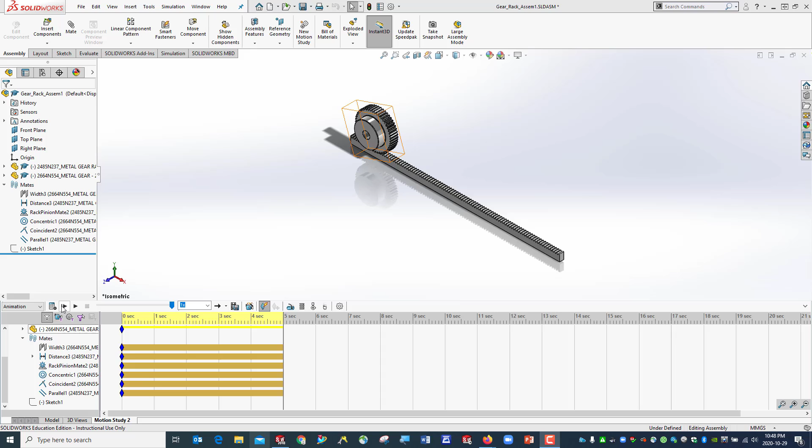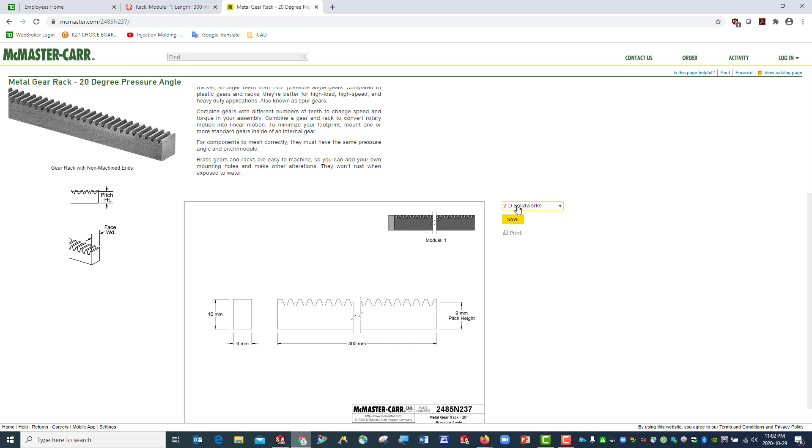First, we're going to make the assembly using a rack and a pinion. You can find those parts in the Lab 6 folder. There's a rack. You can download from here. And here's another one, it's a pinion. You can download from here using 3D solid model.

And you can also get detailed information about pitch diameter, shaft diameter, outer diameter, the width of the teeth, and so on. And also there are some specifications provided here. You can also check the specification here. Once you download those parts, then you will be able to create your assembly.

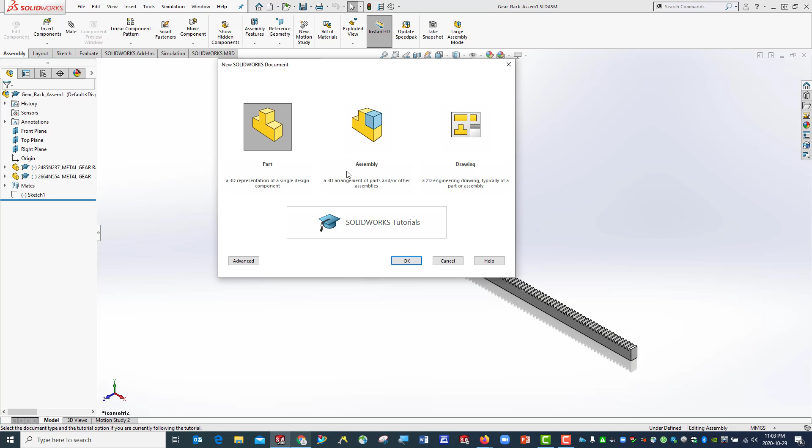Let's get started with a new assembly. Because my parts are all in millimeters, I'm going to use millimeter as our default unit system. Let's save this file as lab 06 rack pinion assembly with an initial.

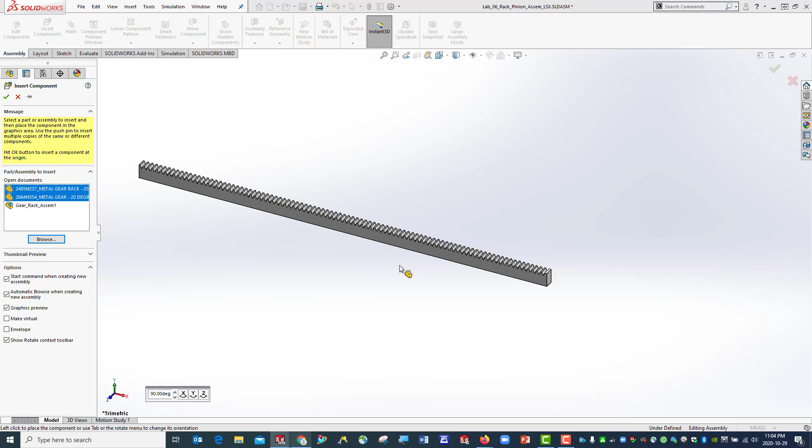Okay, now you can add components. Find those components in your download folders. Browse it. I know it's in my downloaded folder. Hit OK. So I'm going to put it here. As usual, this one is the first one, so it's fixed, right? You will not be able to move it anymore.

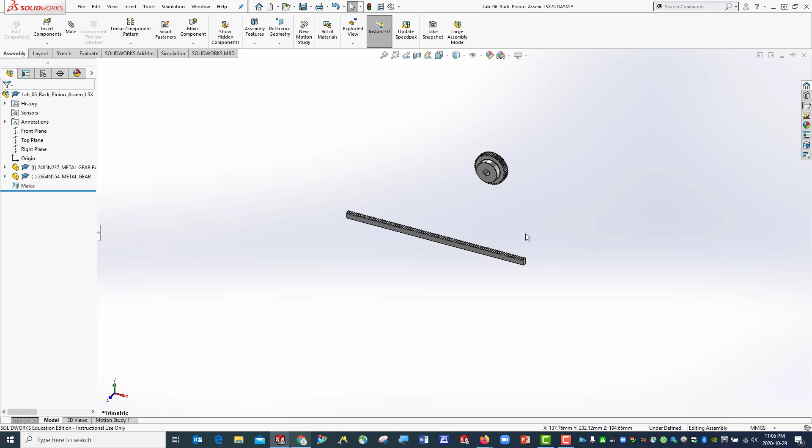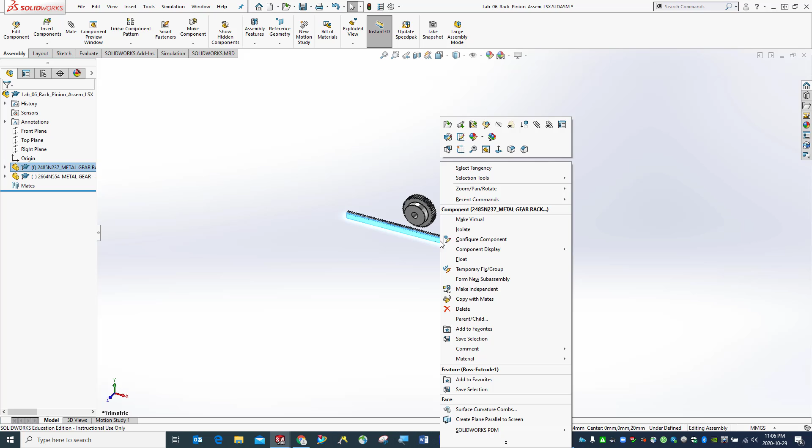And this one is floating. We are going to make the rack stationary, while the pinion rotates on this rack and moves along the rack back and forth. Since the rack is stationary, we simply make it fixed. So the only part we need to put in its correct position is this pinion.

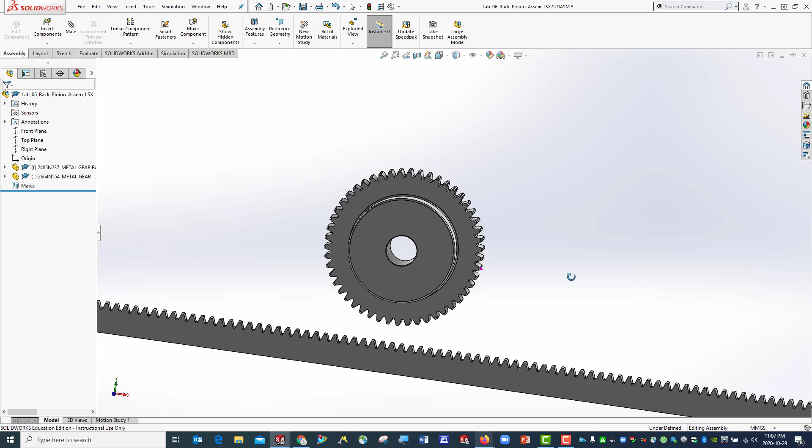So what we can do here, first from this drawing we know the diameter. We know that the pitch diameter is 50, and also the pitch height is 9 millimeters. So that means the pitch diameter should be tangent to this line, the pitch line. So from here to the center of my pinion will be 25 plus 9, which is 34.

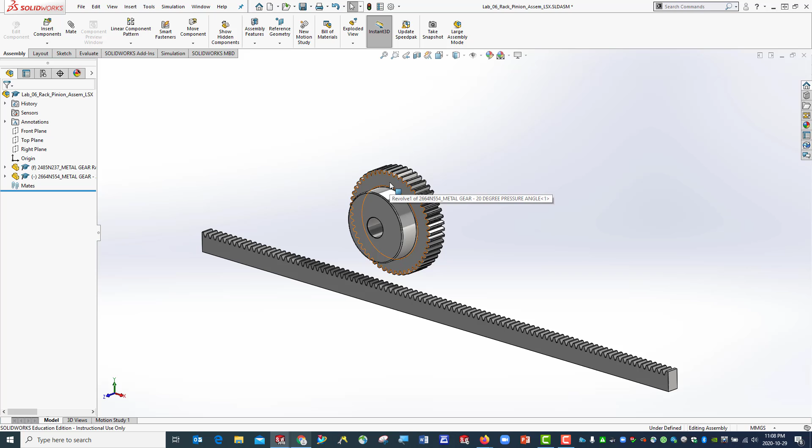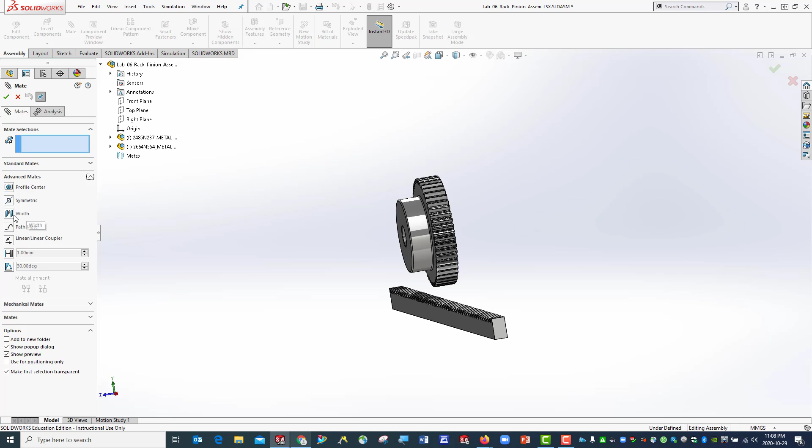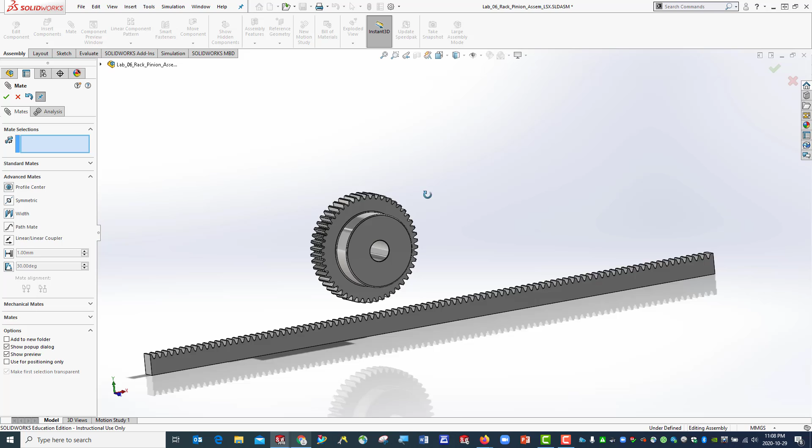So first I'm going to position this. Use the advanced mate method with width. So this width, this face, and also this face and this face to be centered. Hit OK. And now I want to make the pitch diameter tangent to this pitch line.

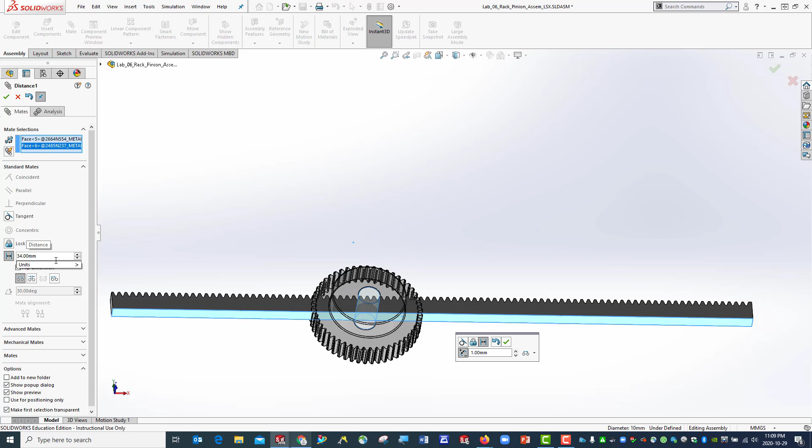So we know the distance of my center line to this bottom is 34 millimeter, right? Let me look at it from the front view. Okay, so it's been positioned. However, this gives center to center, right? So we would like to make something like this, the center.

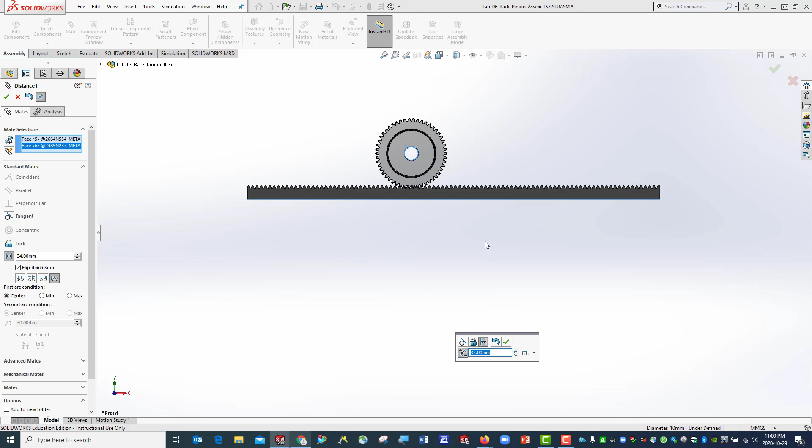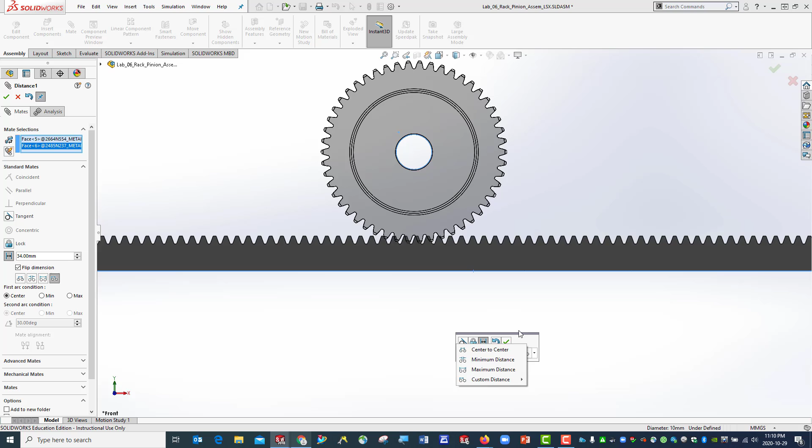Yep, this is correct. So in case you have a different location, then you need to make adjustment using these options. Now accept the mate. Look at it from the isometric view. We can see our part can only be moved along this rack direction, which is good.

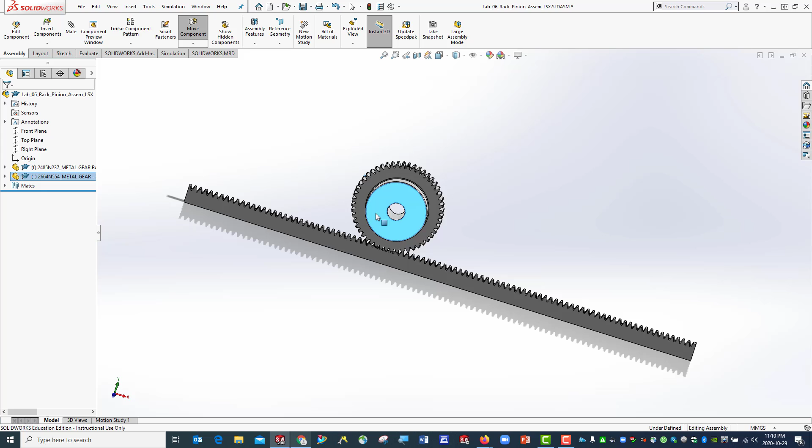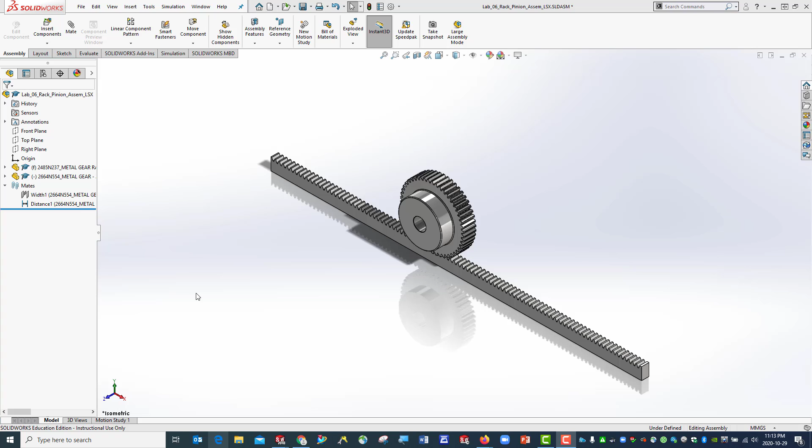And I can also make it rotate. So currently I have 2 degrees of freedom, and I have 0 degrees of freedom for the rack. It's fixed, and I can rotate my pinion, and I can also move my pinion. With my position properly set, then we can start to make our gear mate.

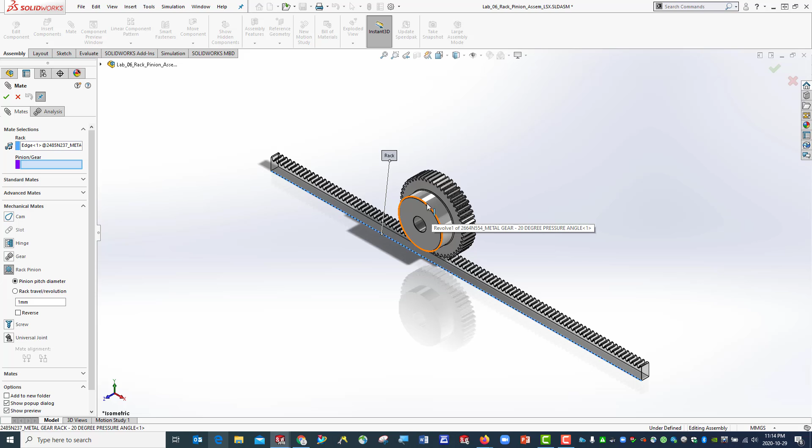This rack pinion mate. So I can choose this bottom edge for my rack, and I can choose my gear. You can choose any of these diameters, right? So it's a rack, and I know my pinion pitch diameter is 50. Hit OK. Hit OK.

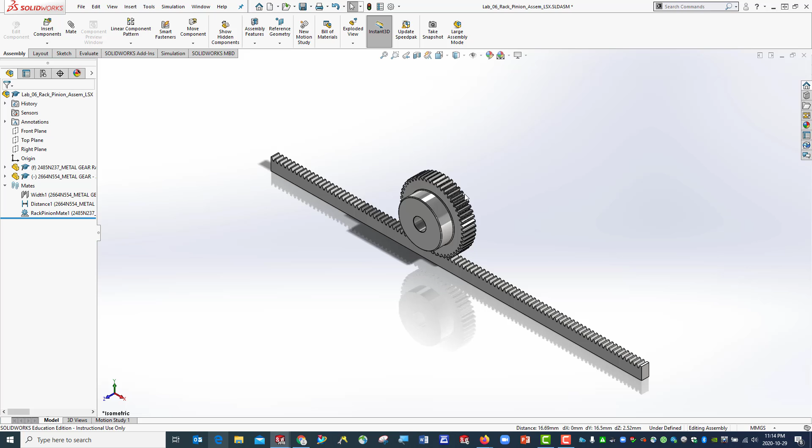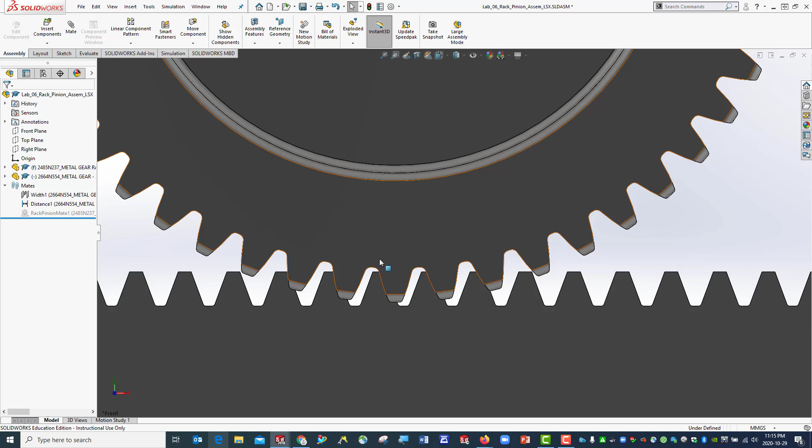Now, if you rotate, it will go along the rack. But there's one thing we would like to do, which is to make the position more precise, right? The teeth are not matched very well. So what we can do here, we can suppress this and then make an adjustment. Okay. All right, looks good to me.

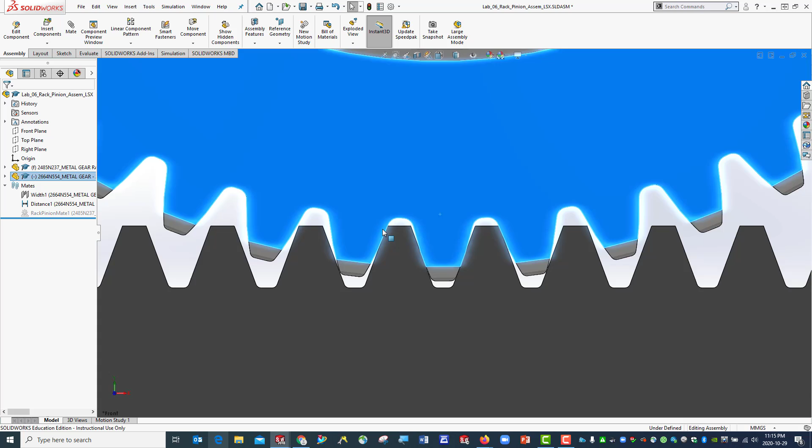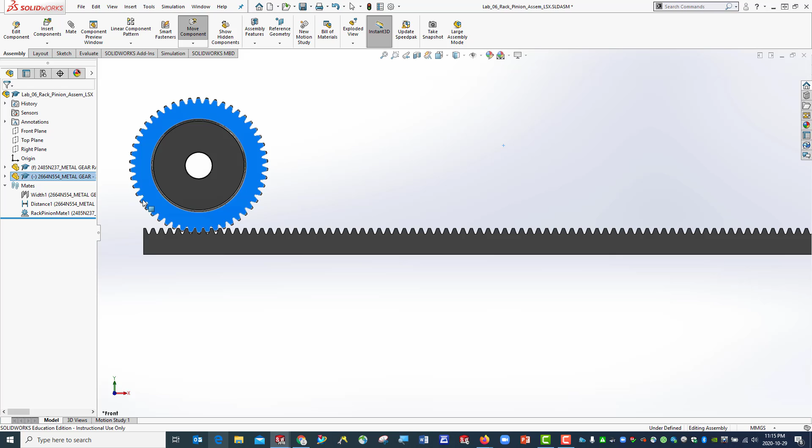Now I can save my file, and then unsuppress my mate. If I rotate again, perfect. So I'm going to put this pinion in this position, and use isometric view. Okay, we're ready to make our motion simulation now. Let me save it.

Go to motion study, and now we are going to make a motor to drive this one. Say we have a rotary motor, constant speed, so let me say maybe oscillating, right? And here's 90 degrees.

We can see from here, this is 50, and this is 300. That means I need to rotate say 5 revolutions to reach 250 millimeters. So I'm going to give say 900 degrees, right? Try 900 degrees to see what's happening. Accept, and say we would like to make this one 15 seconds, and do calculation.

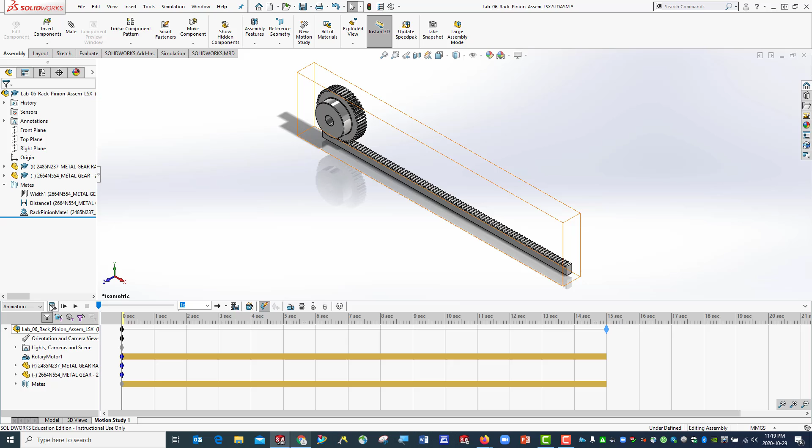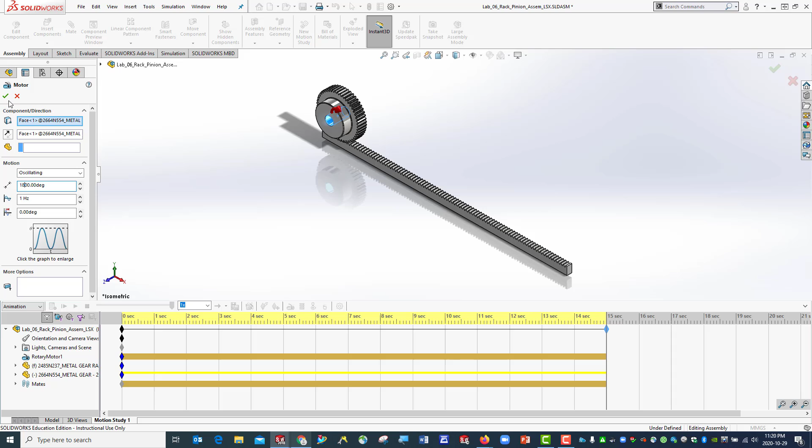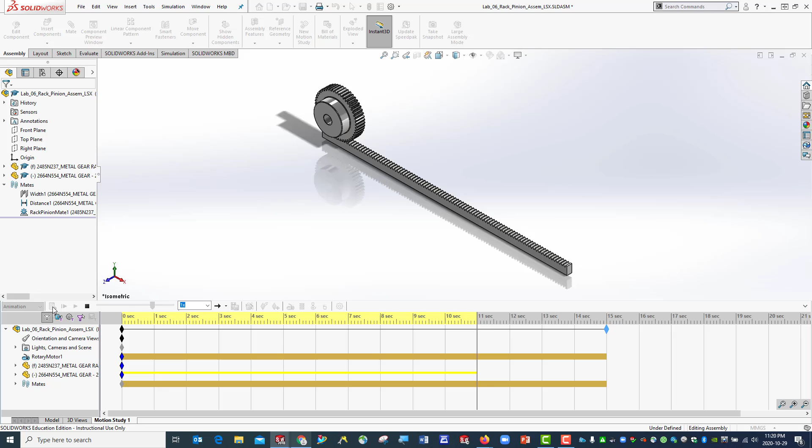Okay, good. So I need to make a modification. We know if it is 5 revolutions, it will be 1800, right? So okay. Try again. Goes in the other way. Interesting. Okay, so let me reverse direction, to see what's happening. Yes. Do calculation. Good.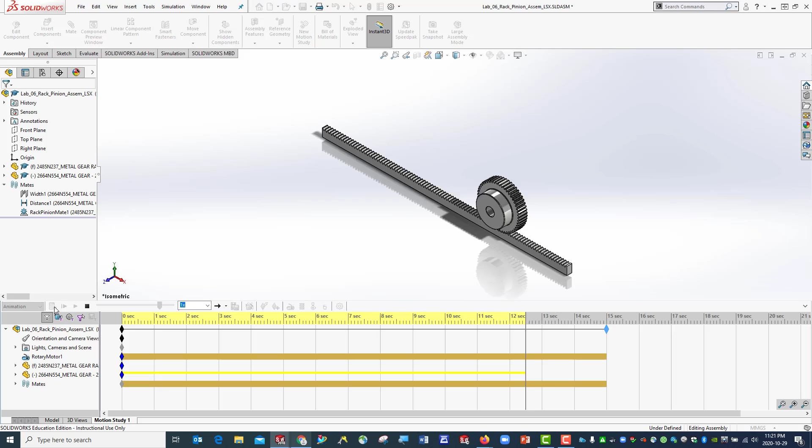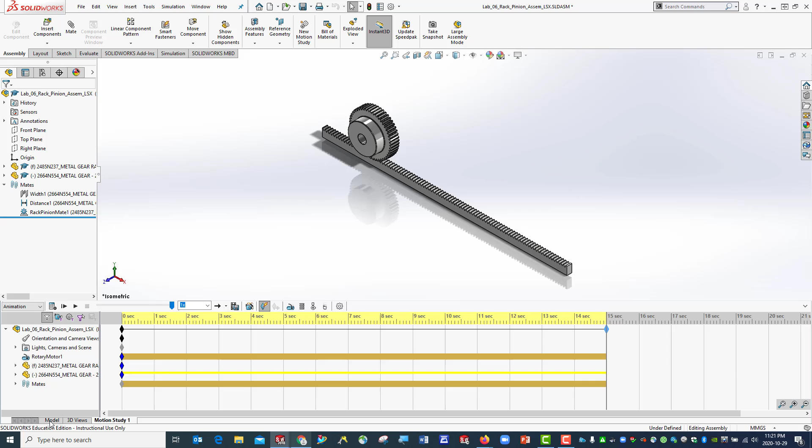Alright, so this represents a stationary rack with a rotational pinion being driven back and forth along the rack. Okay, we can save the file. Next, we're going to look at if we can fix the position of the pinion, only rotating my pinion, and then drive the rack back and forth.

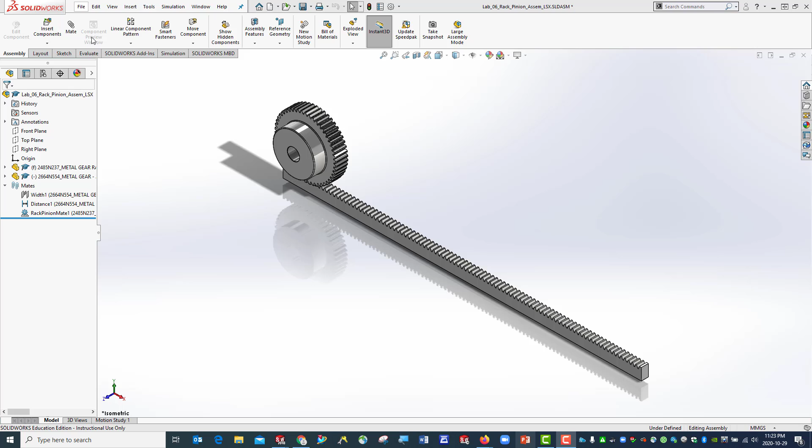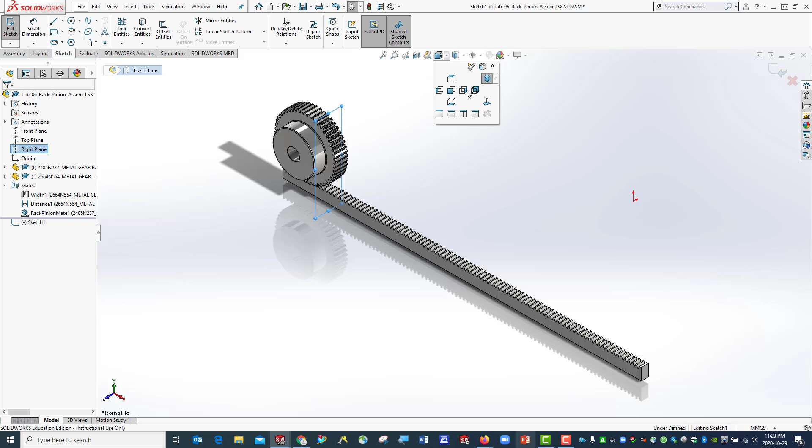First, we need to fix the axle of the pinion. So let's make a sketch, and say the sketch is to be not front but the right plane. Okay, right plane, and sketch. Okay, here's my origin, right? So I'm going to look at the right view. Let me hide those components so we can see more clearly.

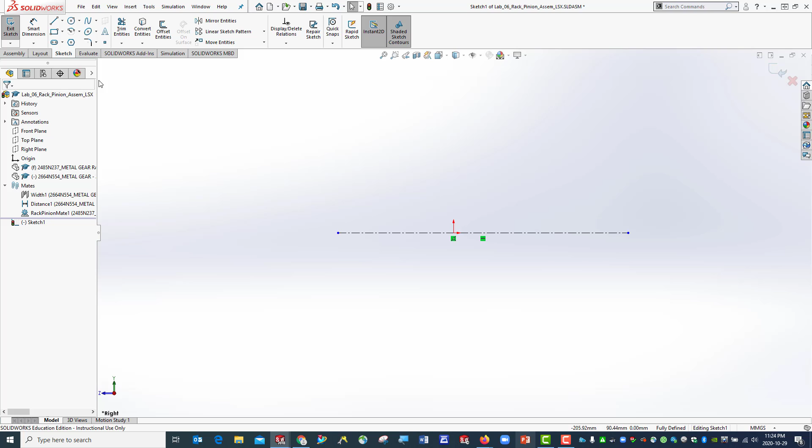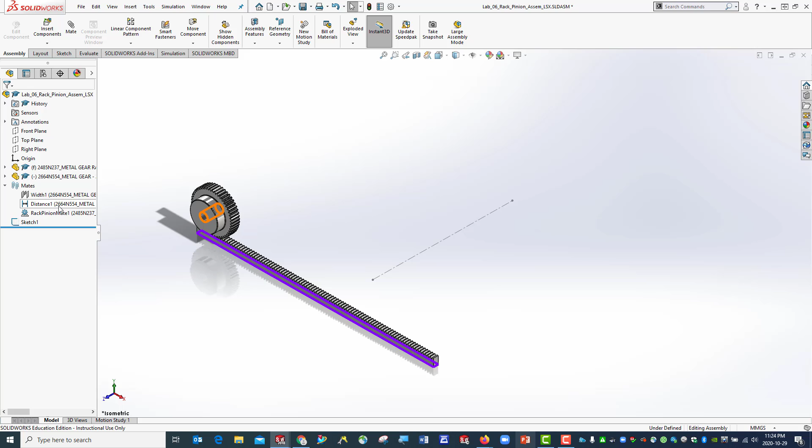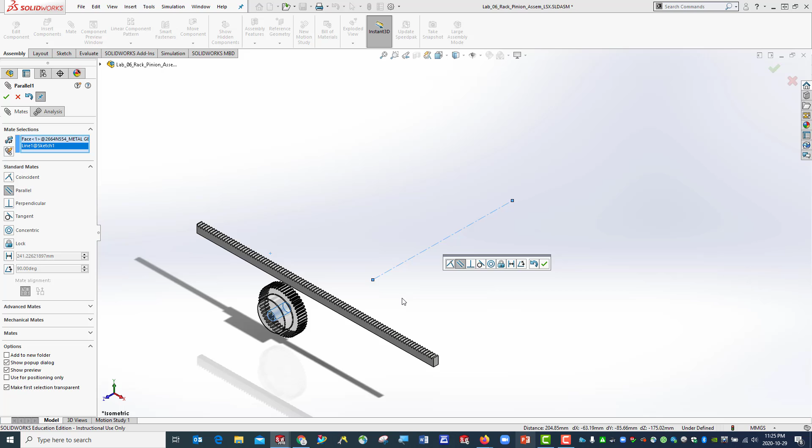Alright, here's my position. I'm going to make a center line. Alright, and then go to assembly. Let's go to isometric view and show the rack. Okay. I'm going to keep this one, and keep this one. The distance also keep this one. The only thing I would like to add is one mate. So the center of my shaft and the hole will be concentric. Hit OK. Add this mate over the assembly.

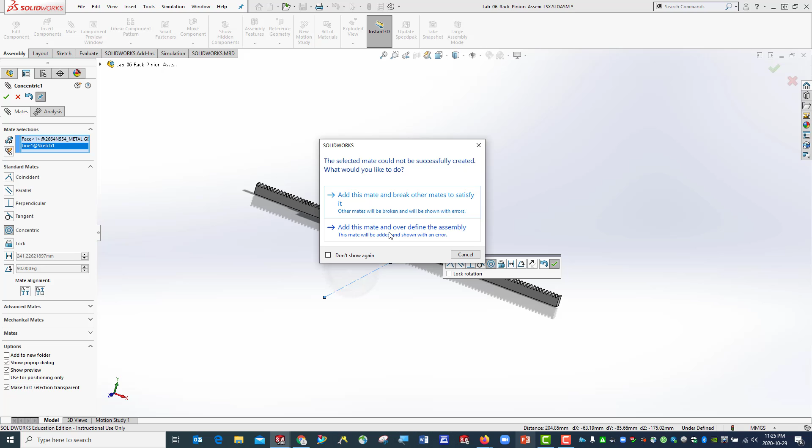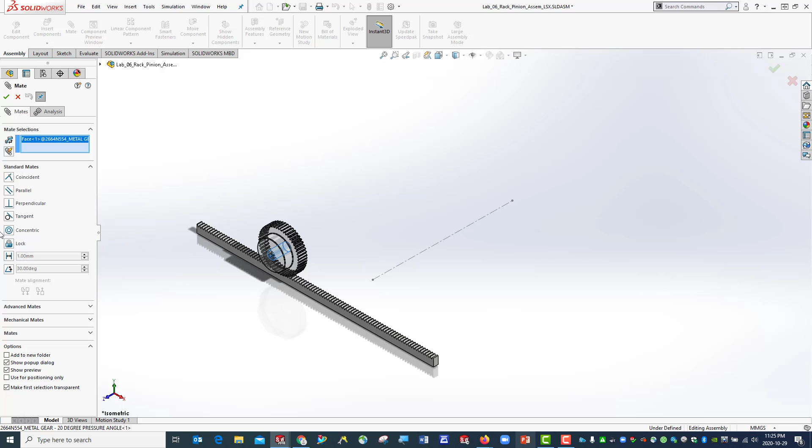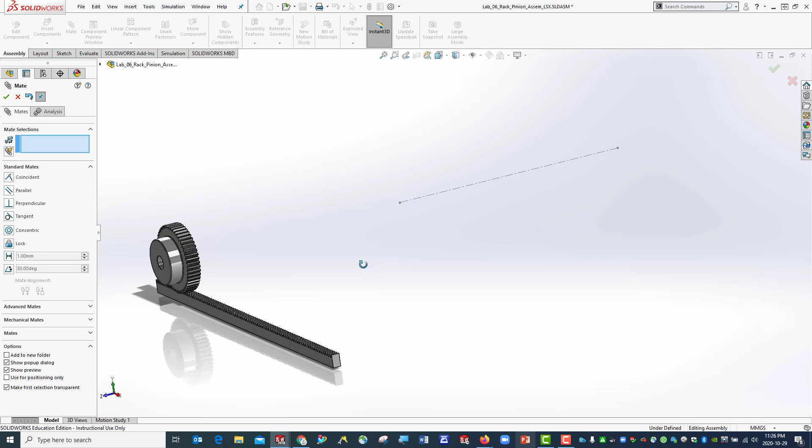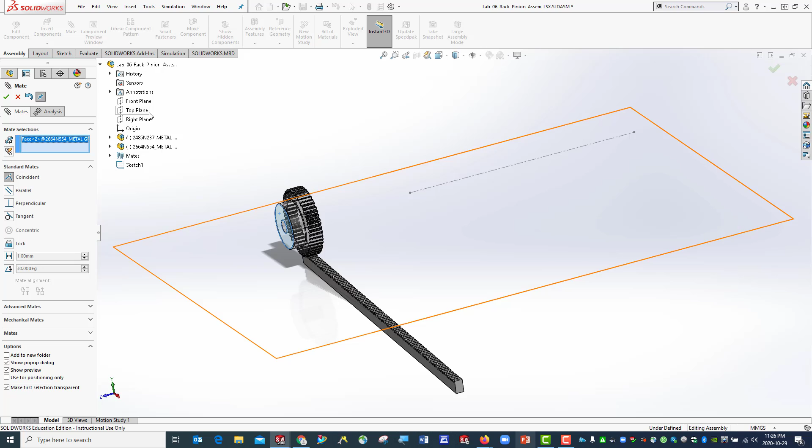I need to do one more thing first to make this floating, and then I can make this surface concentric with my center line. Hit OK. Let me see. From front view, perfect. However, I'm still able to move back and forth, right? So I want to make my face coincident with my front view, which is good.

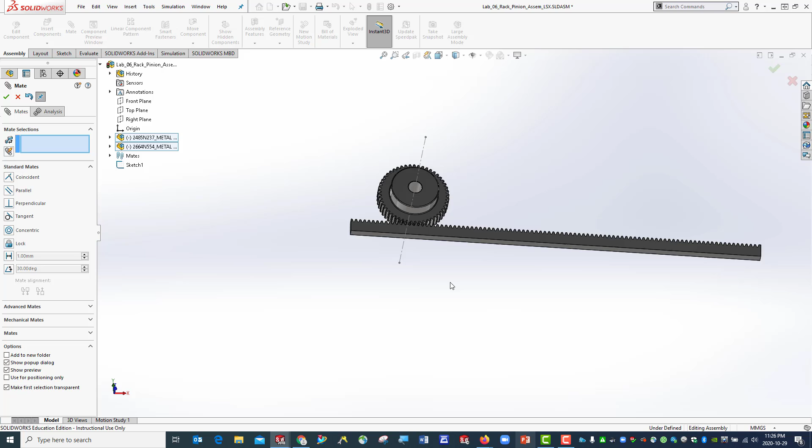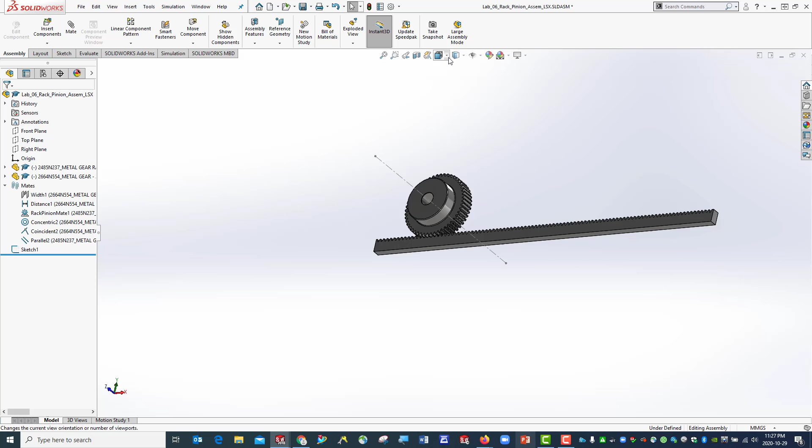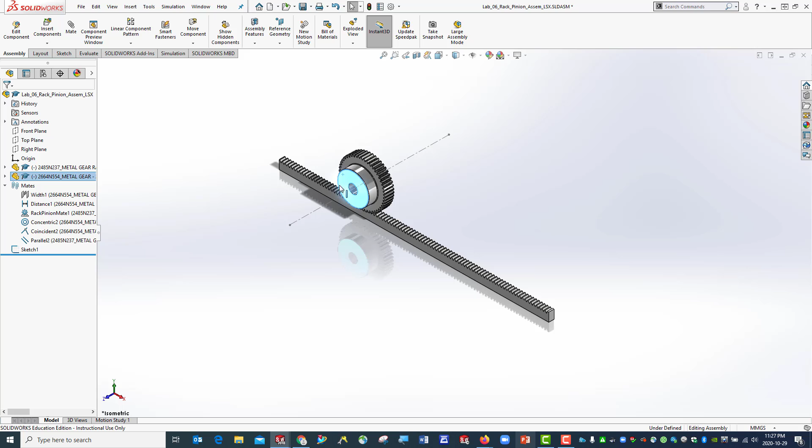And one more thing, because this is moving, right? So I need to make sure my rack is parallel to the top plane. Okay, so then parallel my top plane and the rack. Hit OK. Now look at it from the isometric view. Okay, now you can see I will be able to rotate my pinion now, but the pinion will not be able to move back and forth, right? It only has 1 degree of freedom, and the rack only has 1 degree of freedom.

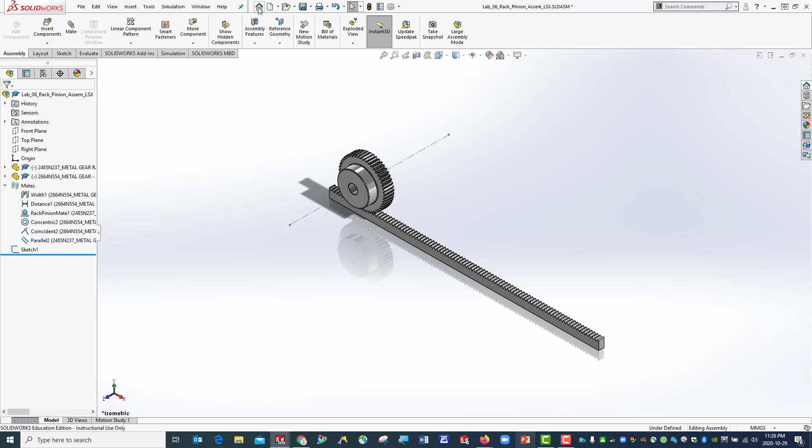Okay, so perfect. I'm going to save it and drive this to this location, and this time I'm going to make my rack being driven. Okay, move back and forth. I'm going to define this, save it again, and put isometric view. Let me hide this sketch. Okay, create a new motion study. Okay.

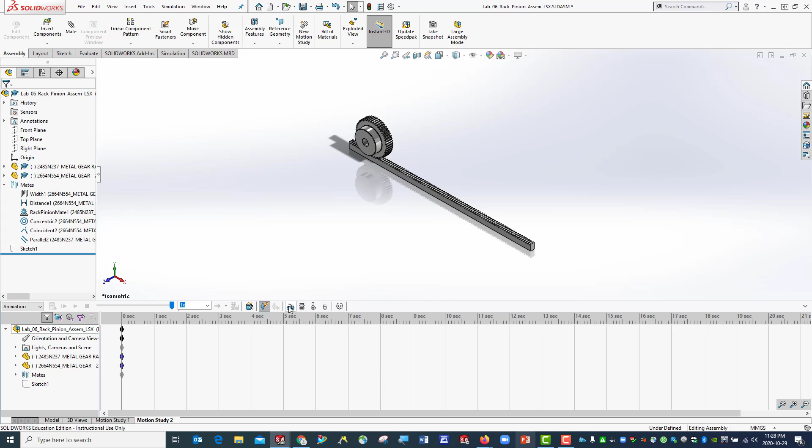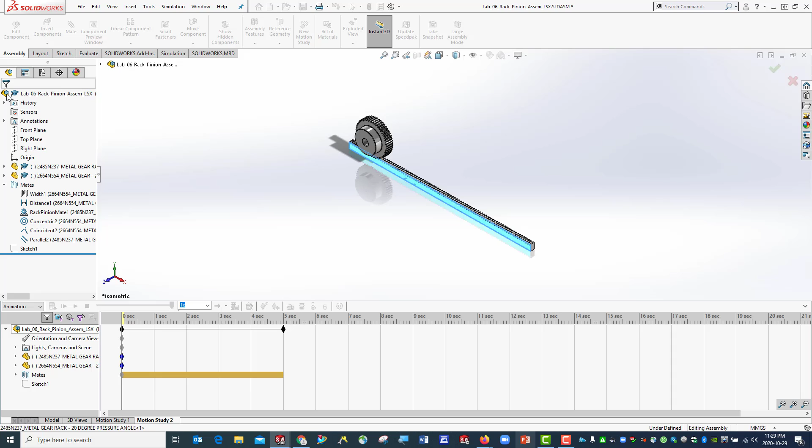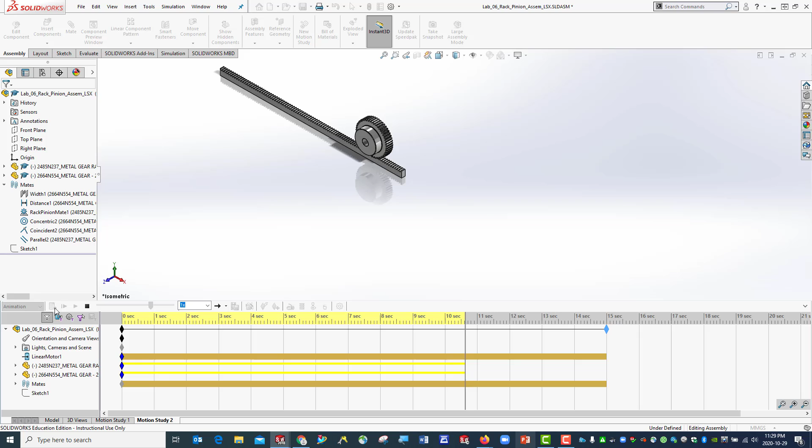I'm good with this, so this time I'm going to use my rack as a linear motor. Sorry, I should use this edge, so it moves back and forth. Constant speed, nope, I would like oscillating, and the length will be 300, right? So I'm going to use 250, 1 Hertz. That's okay. So let me try it, and then I would like to try 15 seconds again to see what's happening to the calculation. Okay. Okay, so that's the simulation. We can save the file.

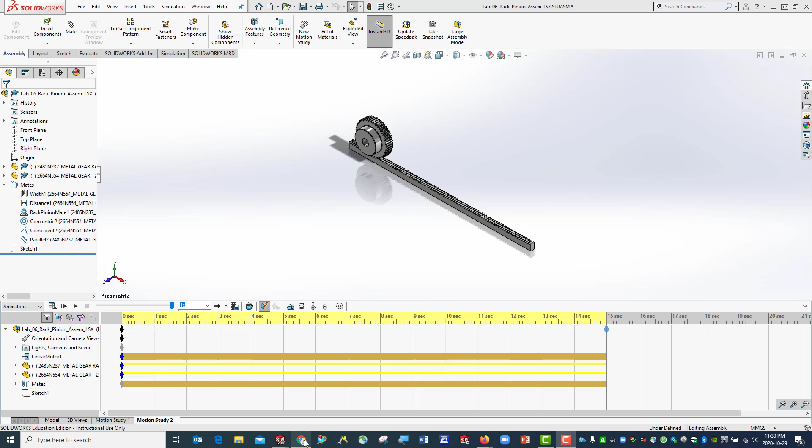Okay, this is the basic procedure to create a rack and pinion motion simulation. There's a couple of things we would like to pay attention to. First, you want to make sure both components have the same module. And also the pitch diameter should be tangent to your pitch line in the rack. So based on the information provided by the detailed drawing, you will be able to find the center distance from the center point to either the pitch line or to the bottom of your rack.

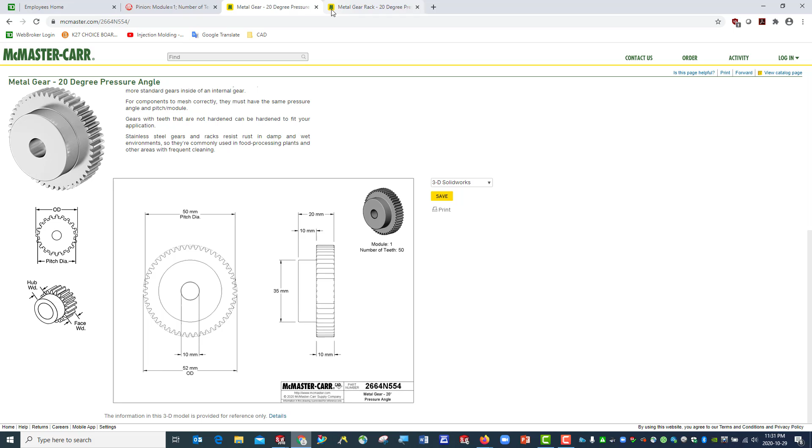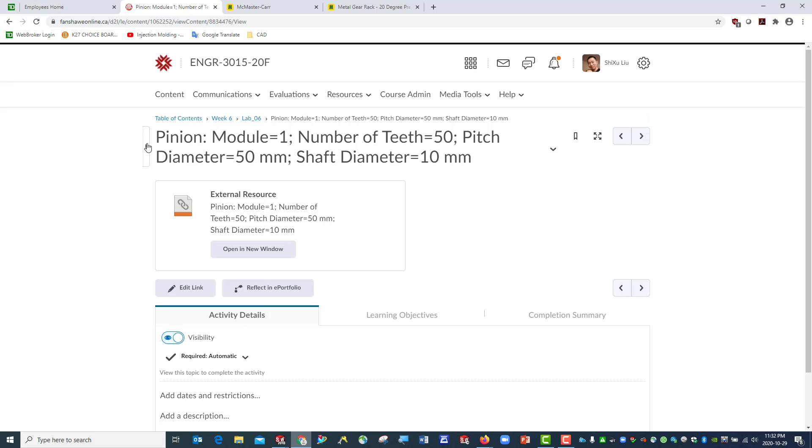If you would like to use other pairs of gears, then you can go to McMaster-Carr and search for yours, either using inches or metric. Okay, so if you use metric, then you should use the same pitch, right? The pitch must be the same, or in other words, the module should be the same. Okay, and also the pressure angle should be the same. In our example, both pressure angles are 20 degrees. Okay, let's see. I think it's 20 degrees. It's 20 degrees. Okay.